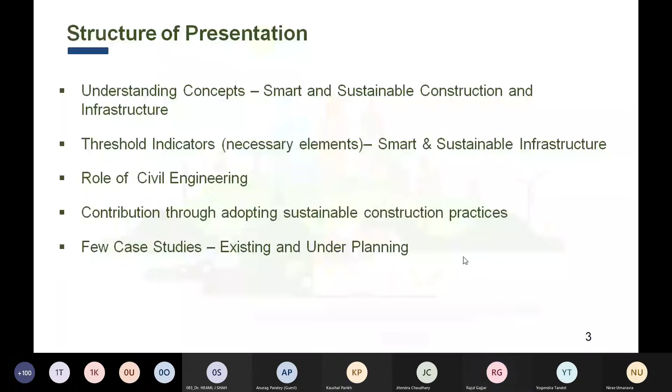So let's start with this whole idea of smart and sustainable. It's a dangerous mix. Let's try to first disseminate and put separately, into a clean box, what we mean by sustainable and what we mean by smart. If we talk about sustainability itself, it has different connotations, different meanings to each person depending on what they are concerned with, and therefore sustainability keeps changing meaning.

But in general, the accepted meaning is about environmental friendliness, and there are different words which people keep using - it's eco-friendly, or someone will say it's green. Then come other parts where people have started adding the connotation of smart, intelligent, and there comes our issue. So in general, when people talk sustainability, they inherently also have started adding the meaning of smart.

So far, sustainability was being looked into because it has been quite some time since the sustainable goals, and the entire globe has been putting this whole issue of sustainability at various forums. So there was a lot of gearing up, a lot of connotation, a lot of understanding, incorporating into our daily practices these aspects of sustainability to whatever level possible for each one in the profession. So let's in general define sustainability. It embraces the environment and its long-term endurance.

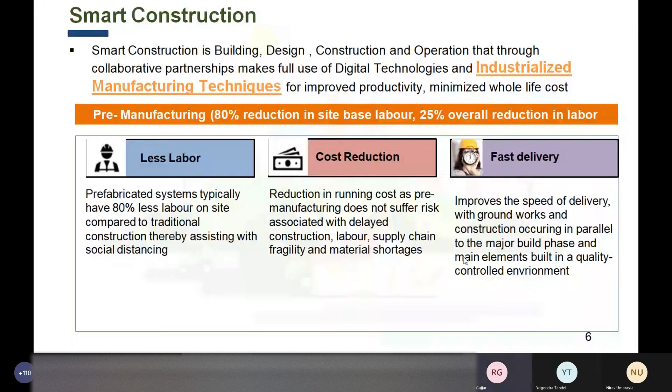You will be able to, many times what happens is that a lot of sustainability is already being addressed, but you do not have the numbers, the facts on your fingertips. When that happens, of course, you are answering randomly. Of course, you are put to a disadvantage because you think that it is happening.

But you beautifully incorporate the smart and the sustainable, you are in control of the facts and figures. That not only helps you report, document, that also puts you at the forefront of what you can do to further improve or impact.

Let us look at smart materials a little bit.

What do we mean by smart materials? Materials which have the ability to respond to change, in whichever condition or environment they are exposed to. And how should they change? There are two possibilities: it can deteriorate, but no, you want a material which responds in a positive way. When exposed to environmental vagaries, they respond in a useful and repetitive manner. It's not just once, because the environment around them persists, so once they capture that challenge, they have to sustain it. It has to be repetitive.

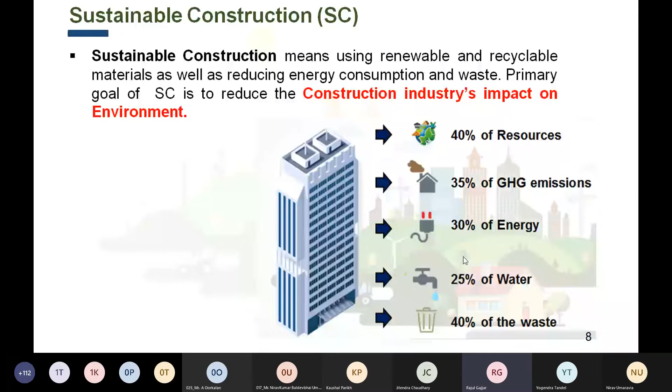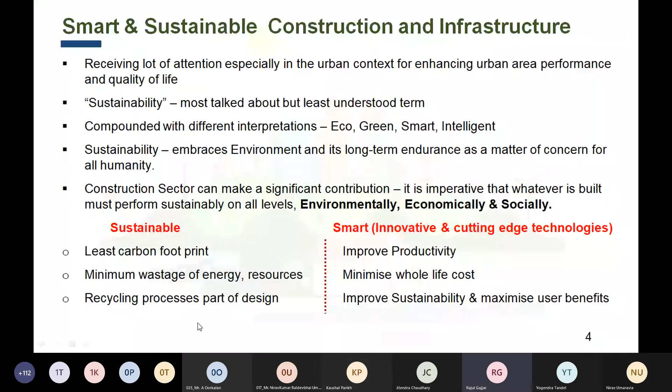And therefore, I go back again to this slide. Also to this slide. I did not talk a lot about the recycling there. This is sustainable. This is going to help us achieve that sustainability. Just as you think create, you have to think demolish. Both are equally important. The entire industry is responsible for where we lead by looking behind at what we are leaving behind.

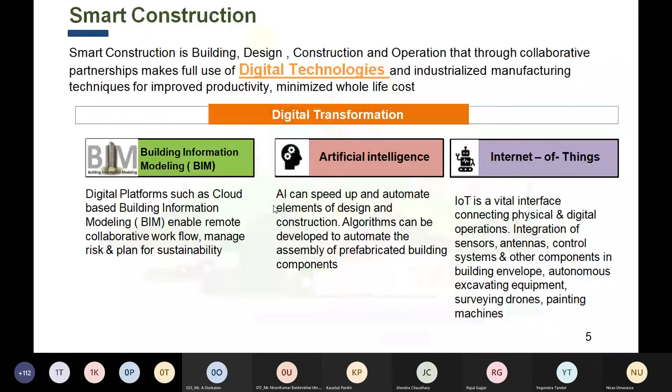The entire infrastructure is a set of structural elements which support the day-to-day functions. We have so far not looked at the day-to-day functions. As an industry, we have looked at the utility, the need of the governments, of the corporations, of the industry, of the client, but we have not been involving ourselves. We thought that was the whole part of project management, of different people delivering the management systems of whoever else, but not the construction industry.

If we don't look at the day-to-day functionalities, if we don't understand the day-to-day functionalities, the needs, we will not be able to answer the questions. Have you been sustainable? Have you used smart technologies? Are your buildings sustainable? We won't be able to answer that. Because this is the single factor that influences each one of us day on day, morning, evening, night. It influences the entire human society.

Therefore, sustainable infrastructure refers to the designing, building, operating of the structural elements in ways that do not diminish the social, economical, and ecological processes. These are the processes that are going to maintain human equity, human quality of life, and therefore it impacts our natural systems, the ecology, the environment that surrounds us. So we can say that infrastructure is critical to sustainable community development. The infrastructure that we are building today is going to shape tomorrow's communities.

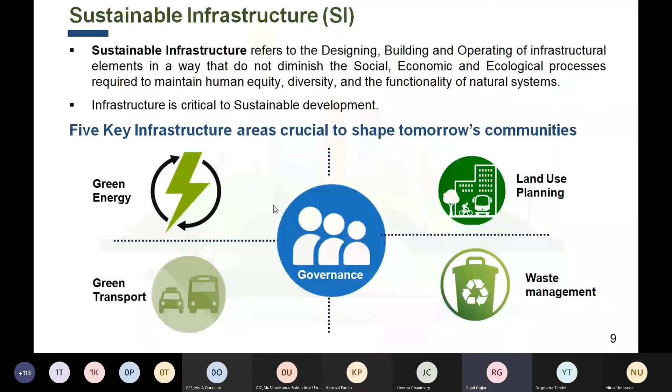So here comes this whole amalgamation of what we mean by smart and sustainable, in attaining the goal of creating smart and sustainable infrastructure. The urban authorities often pursue goals - the goals of economic vibrancy, the goals of competitiveness. Now these goals will directly be in conflict with your sustainable goals.

So the balance will keep on tipping one end to the other. If you say that yes, you have created a very economic solution, a very competitive solution wherein everything is as it should be, and it does answer many questions on the economic front, maybe you have let go of some of your sustainable goals. Because sustainability and economic competitiveness are not things that go together in the same box. They are at loggerheads, they have different purposes. And therefore you have to understand the commonality.

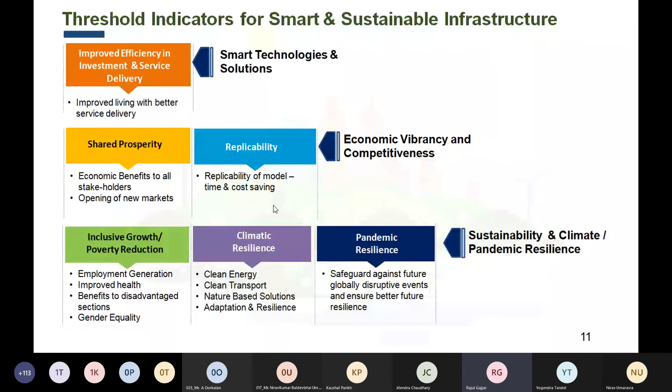So let's now understand. I have put in so many factors saying you need to do this, you need to do this. So here comes this poor civil engineer. What am I supposed to do? How much can I do? You are putting in a lot of responsibility. You want me to be a magician, to know my construction, to know my material, to be responsible for all the smart technology, to be responsible for the sustainability. Am I equipped for that?

So let's understand the roles. The role of the civil engineer is not just limited to any planning. It is not limited to just the designing of one aspect of the structure. You need to understand the whole in order to do the part. So you have to lead your role in planning, designing, building, and ensuring a sustainable future.

How? By all those technologies that I talked about. By being the master. When I say master, I don't mean you have to create the technology. By master, I mean you need to know the know-how of using the technology, to be able to question, to demand, to foresee, and also to supervise and inspect the technology.

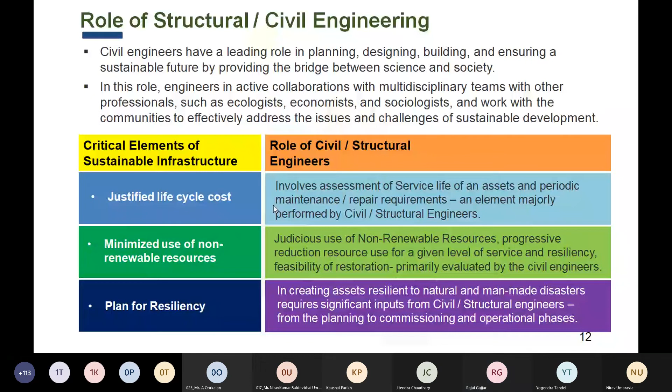So, first and foremost, try and distinguish what is unsustainable and what is sustainable. How much of the sustainable can be brought in and how much of the unsustainable can be pushed out. That is where your comfort level will stand.

You cannot just say, oh yes, today I take a pledge, I'm going to do only sustainable technology. Not possible. You have to very slowly, very minutely take a feel of how you can push out and adapt, adopt, implement sustainable practices. Push out unsustainable so that you know what that vacuum is, you know what the cost is, then gradually keep moving to the sustainable.

Not just in terms of the materials, you also need to adopt sustainable practices. As I said, when I say sustainable practices in design, planning, and construction, I mean all that smartness that I talked about on that earlier slide. Use all digital technologies. It does involve a lot of cost and time and efficiency. There is an increase, a phenomenal increase, and that is also what sustainable practice is all about.

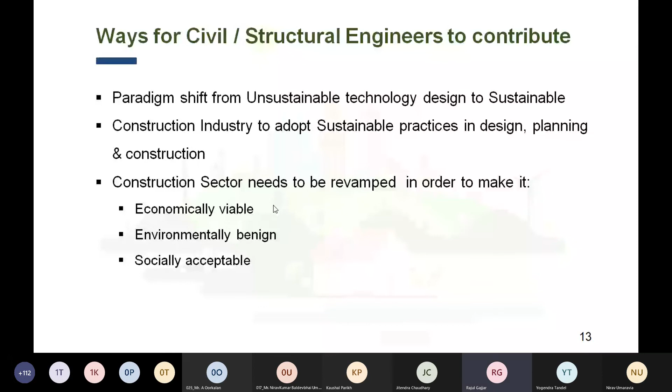So let's look at the old and the new paradigms. By old, I really mean, I'm not sure whether I should call it old, because even to this date, most of the time, the small players in this industry think only in terms of time and cost. Now, because of the basic standards that are improving by the construction industry, by the big players, quality is also an aspect, as I gave you that example of that small hole in which the nut would either have a play or would not fit. It's that close that you can get to. So therefore, quality has become mandatory.

But it is still the old paradigm. You cannot go ahead thinking only in terms of time, cost, quality.

You have to bring in the bigger paradigms right now, because the entire world, the entire country, and the entire state is being subjected by other domains to these norms. Like it or not, adapt or not, you are already into those rating systems, those marking paradigms. Those parameters are already in place. It's just that you are not able to see them because they have not popped up yet, where suddenly a rating comes for a building, say a 1-star rating, while a similar building in the neighborhood gets a 5-star rating. Pop goes your entire effort, your office, your management, gone.

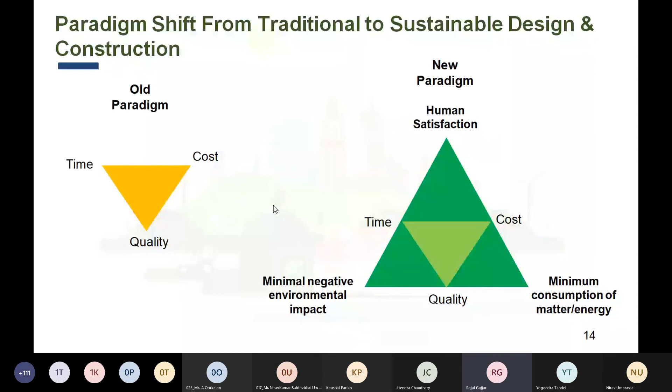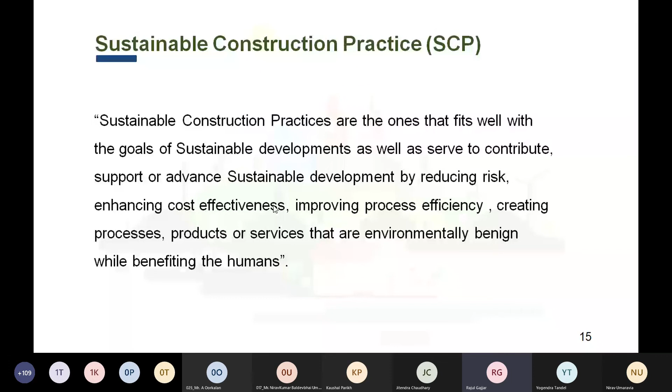And therefore, let us try to understand what we mean by sustainable construction practices. Sustainable construction practices are the ones that fit well with the goals of sustainable development, as well as to serve, contribute, support, and advance sustainable development by reducing risk, enhancing cost effectiveness, improving process efficiency, creating processes, products, and services that are environmentally benign and beneficial to humans. Objectives, as I have again and again said: social, environmental, economic. Key elements: design integration, material selection, resource conservation, lean manufacturing, and construction waste management.

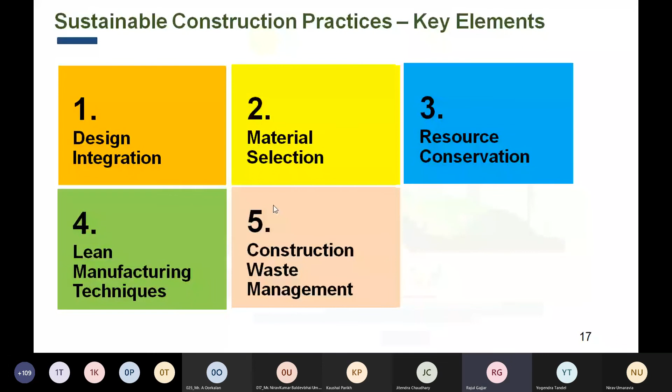What do we look at when we talk about design integration? You have the client and so many other players, so many stakeholders. You need to integrate the entire decision making, the designability, the constructability, so that your design is conflict free. Ultimately, you have to show outcomes which have reduced the rework, the waiting time, and the over processing.

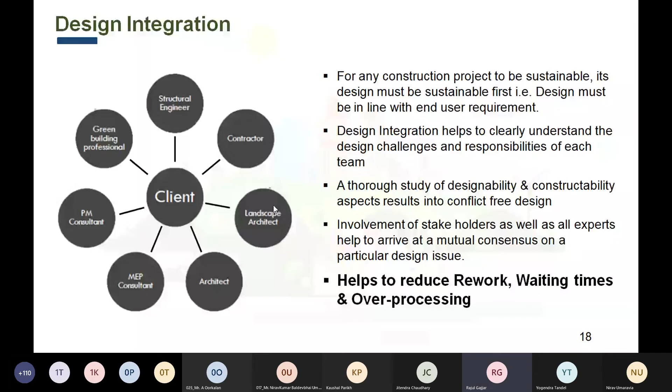What conservation are we talking about? Land, water, materials, energy. Everything is at a cost. You better start looking at how much you can conserve by so-and-so decision. Use non-toxic materials, employ recirculating systems, scrap all the huge energy consumption systems, choose materials and methods which use less energy, and you are on firm ground.

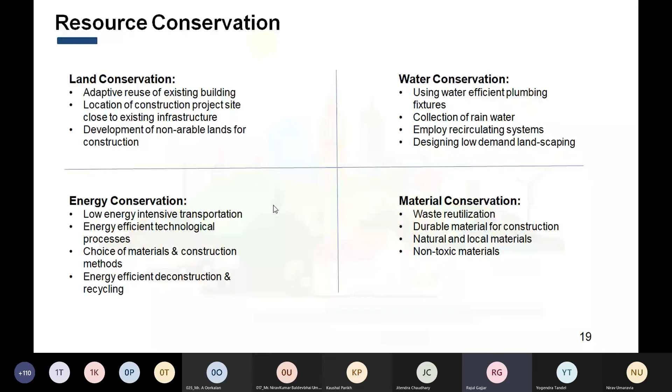So this is where I wanted to culminate, to bring to an end what we started with. When we talk of construction waste management, we have to do a circular economy. We have to not say build, operate, maintain, leave. We have to put a circle around the entire building life system, wherein we have built into it the waste management also. If you have thought about the waste management, you are using it to your advantage, to the advantage of the economy, to the advantage of the built environment, and ultimately to the society and human comfort.

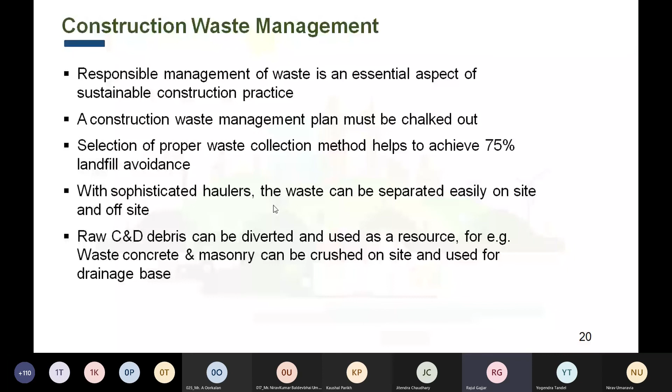So strive for material efficiency, design low maintenance, design long life. Choose materials which are adaptable, which can be reused. It can also be thought of in the process of deconstruction, demolition, and how to reuse all this waste material, whether you are able to use the material after it becomes waste. Lean construction, of course, this has to be looked into.

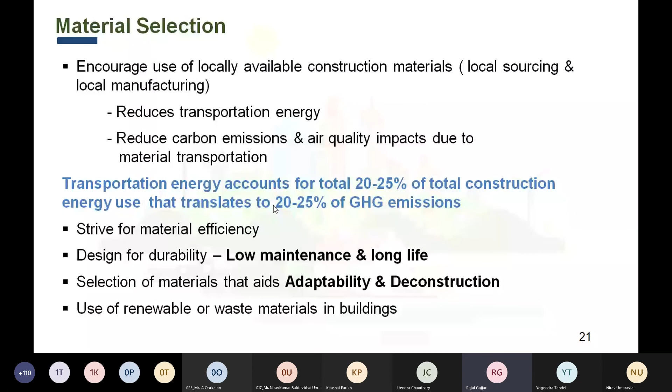Concrete, as I said earlier, 1 ton of cement production itself releases 0.9 tons of carbon dioxide. 1 ton of cement consumed in concrete absorbs 0.4 tons of CO2.

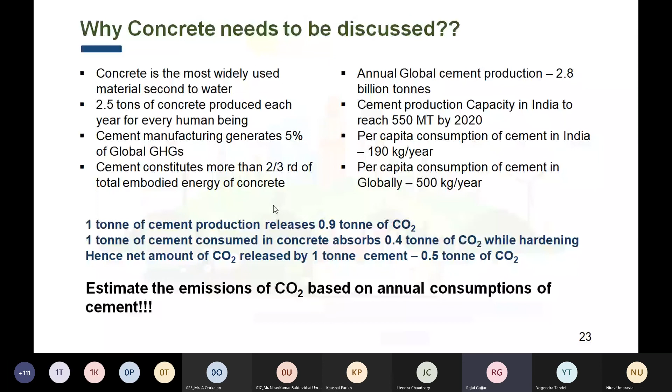So create your own roadmaps, create sustainable structures using all the technology, all the materials, and all your know-how as a good civil engineer.

Alternative materials - I'll share these slides. Of course, this is very common knowledge now, and everybody knows what these alternate materials are. They have been experimented with, recycled, and used.

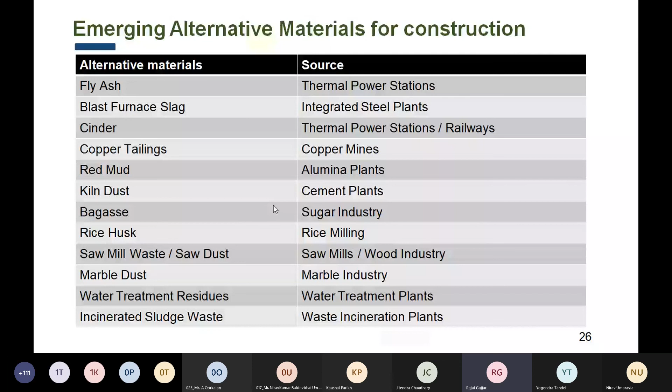Some good examples: IIT Madras did a 4 MLD capacity sewage treatment plant, and look at what they were able to do. It is in use, currently receiving 2.5 MLD of sewage. It is treated using sequential batch processing and reused in sanitation, flushing, and gardening. The excess volume of treated water is then pumped into the lakes on campus before further treating the water and distributing it through the metro water supply pipeline connected to the campus.

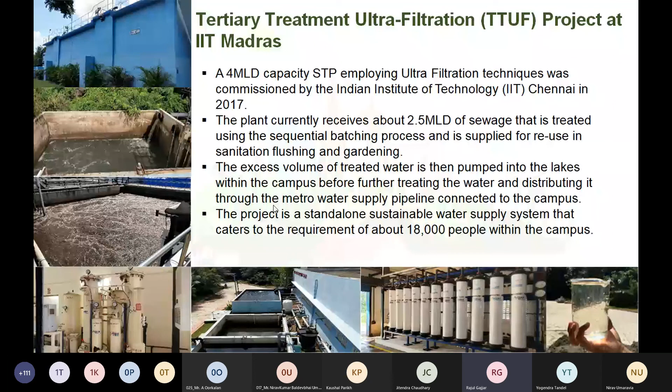So it goes out into the city, reused. The project is a standalone sustainable water supply system catering to the requirement of 18,000 people within the campus. Look at how this is already being done. Therefore, Chennai, looking at the IIT Madras model, has started deploying it. They have critically designed the entire project and are going to replicate it, ultimately impacting their entire population.

So this is how we need to look at good case studies. This is how we need to start implementing smart projects.

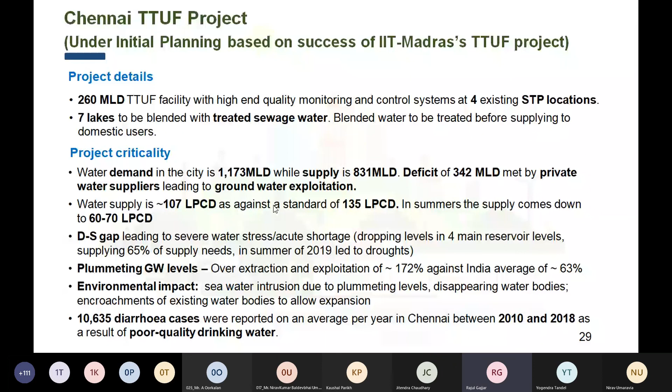Our own Sabarmati Riverfront project - what was the objective? Environmental improvement, social infrastructure, sustainable development. When we started this project, we had huge challenges of rehabilitation, and challenges of sewage and drainage.

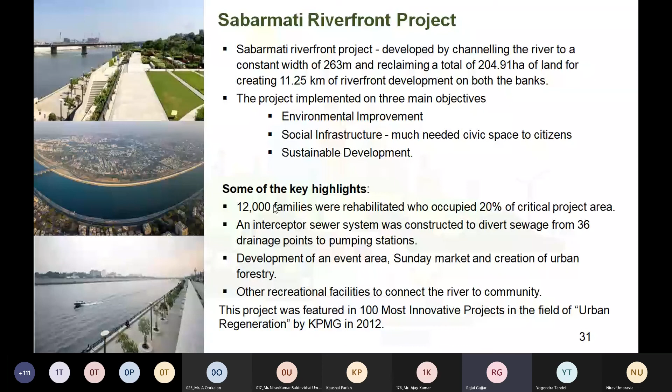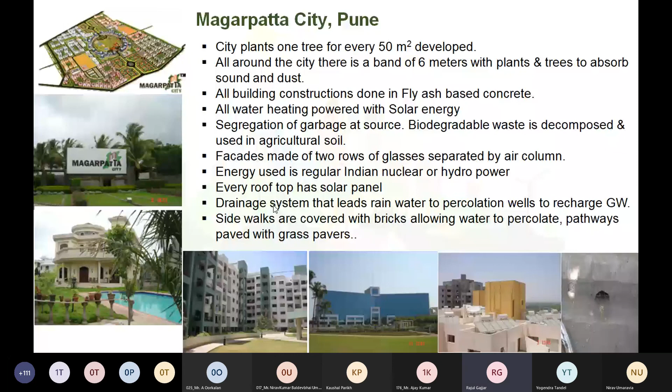Imperatives: integrate smart and sustainable solutions. It's not just a fancy word - know the technology, incorporate it. The extent of using smart elements must be gauged in the local and economic context, otherwise it will prove to be very costly and not acceptable to the local units.

Keep using, keep researching, keep doing hands-on work on small projects that will increase your comfort level and confidence level to become aware, and spread that awareness to your students. Use the codal specifications, use the standards, use the new materials and their properties to your advantage, and you will be masters of smart and sustainable construction.

Thank you. So I end my talk here.